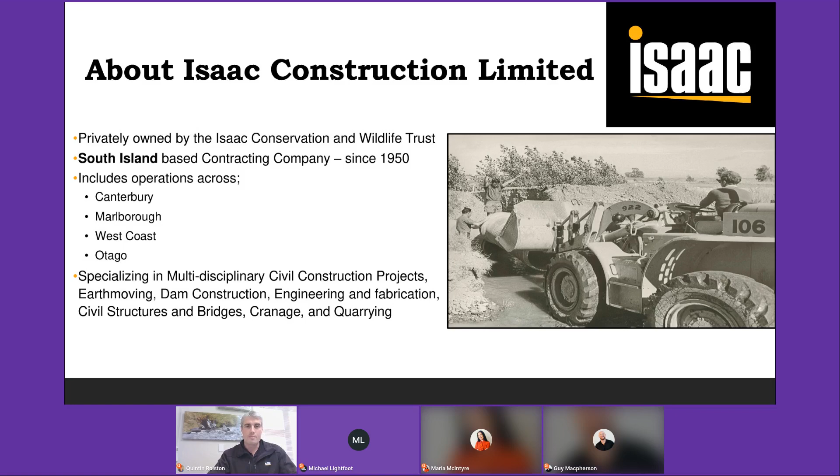We've got three key brands. Simcox is our Marlborough brand, Isaac Construction is our Canterbury and Southern brand, and Liddell Contracting is our West Coast team. And you'll see this pop up a little bit, as the Isaac Conservation and Wildlife Trust is our ultimate owner, and I'll talk about that at the end of my presentation a bit more.

So we're based in Christchurch. This is a view across our property where our key quarry is at the moment, looking back across Christchurch and over to the Port Hills. We're situated between the Waimakariri River and the airport.

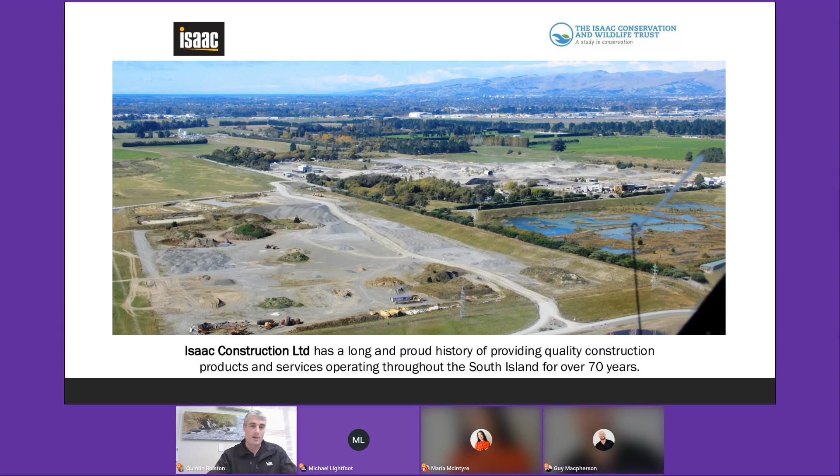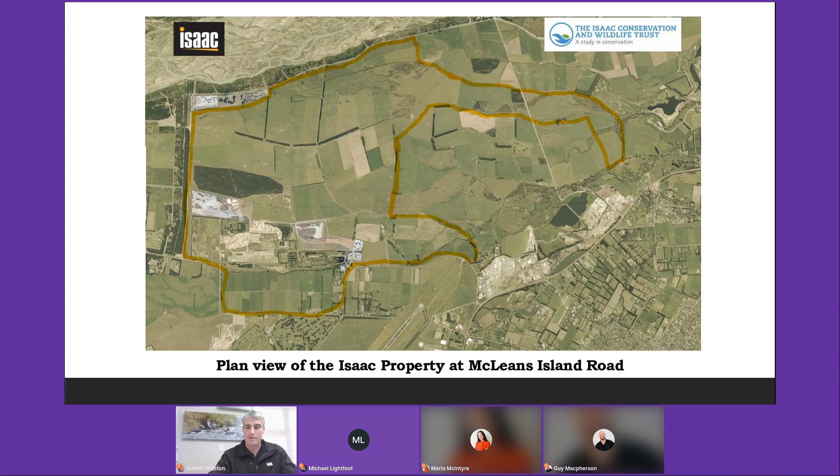Bit of a snapshot of our land there. We've situated 1,100 hectares, like I say, between the Waimakariri River and the Christchurch airport.

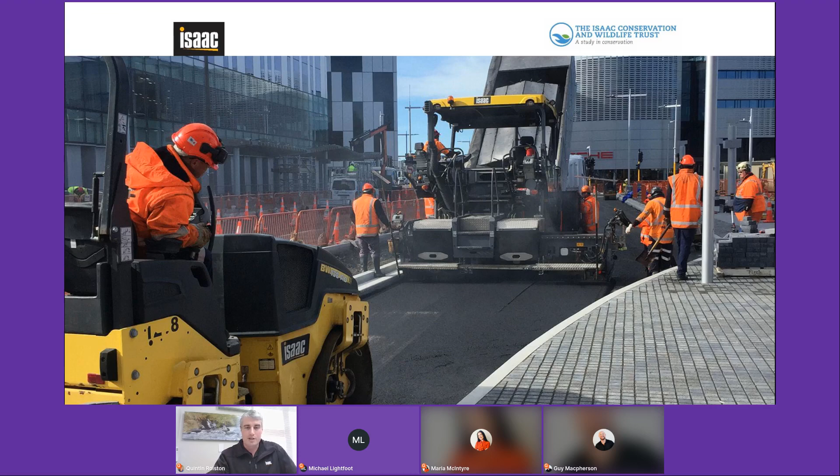Pictures are always helpful to actually visualize what it is that we do and why we might be interested in noise and vibration monitoring. So this is pretty typical of the type of things that we are out there constructing and building: streetscaping works, asphalt paving, paver laying, and general construction, particularly central city type construction works.

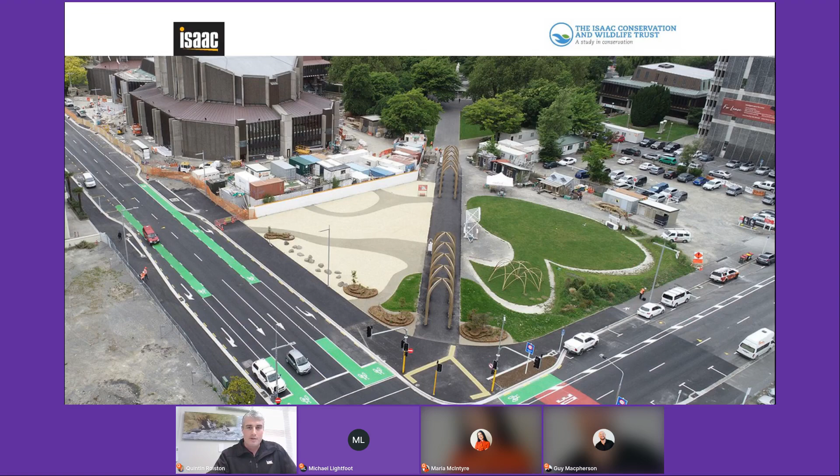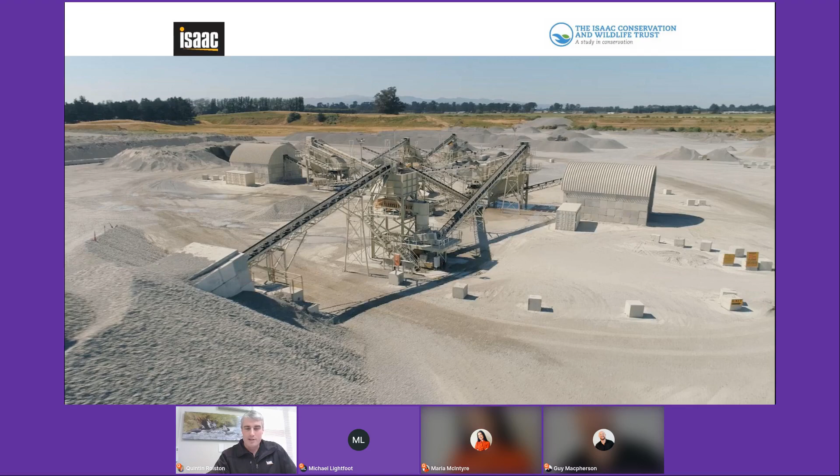Quarrying operations, so crushing and turning big stones into small stones, which is pretty interesting, but certainly has a noise, vibration, and dust effect on the surrounding community. Isaac Asphalt is a key part of our business here in Canterbury.

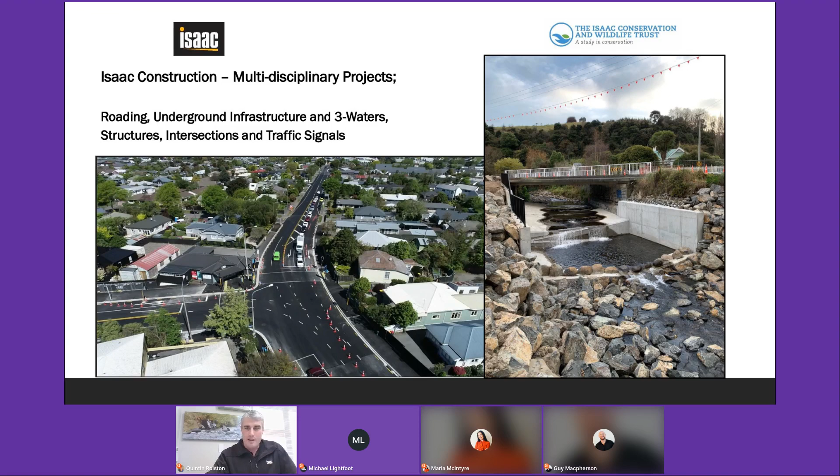And just a few more project examples of what we've been building. Christchurch Northern Corridor access into Christchurch on the left there, and a river upgrade project in Dunedin on the right. A bridge construction project on the west coast, which is just coming to completion now.

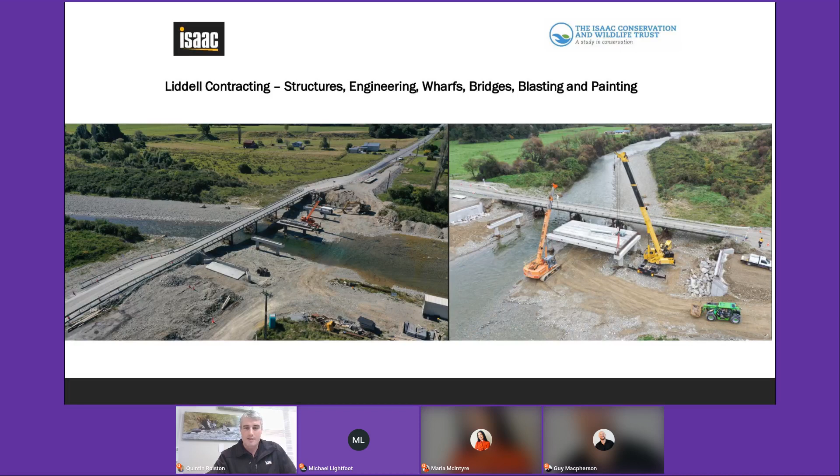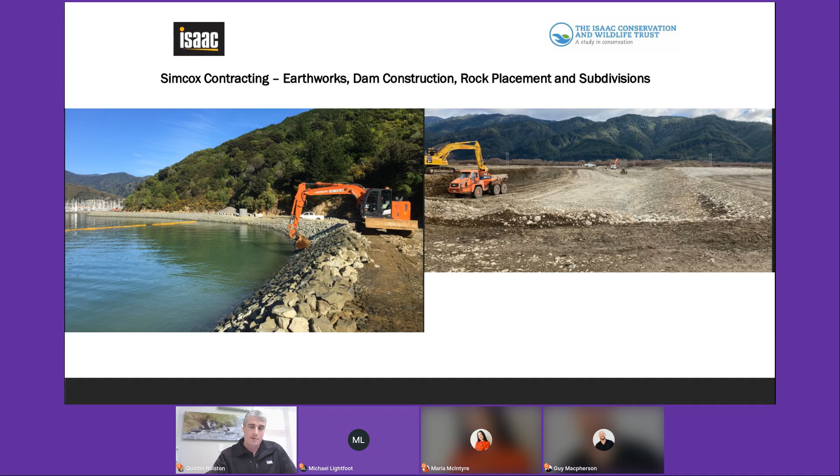And rock placement and dam construction and earth moving up in Marlborough. So that's a little bit of an overview of the Isaac, Simcox, Liddell businesses and what we do as a company.

So I'll move on to our particular project that we're looking at today, which is the Retail Quarter project, George Street upgrade in Dunedin.

This is the project area, an overview of the project area. For anyone that knows Dunedin, hopefully you'll have an idea of the Octagon. Our project starts one block north of the Octagon on George Street and Moray Place intersection, and it travels 800 metres north up to Albany Street, encompassing this central section of this photograph.

What we're additionally doing is the fringe works on Filluel Street and Great King Street, which is not how the project started out, but it's been added to our scope as we've gone through the process. And we're doing pretty substantial three waters upgrades across this entire network of site.

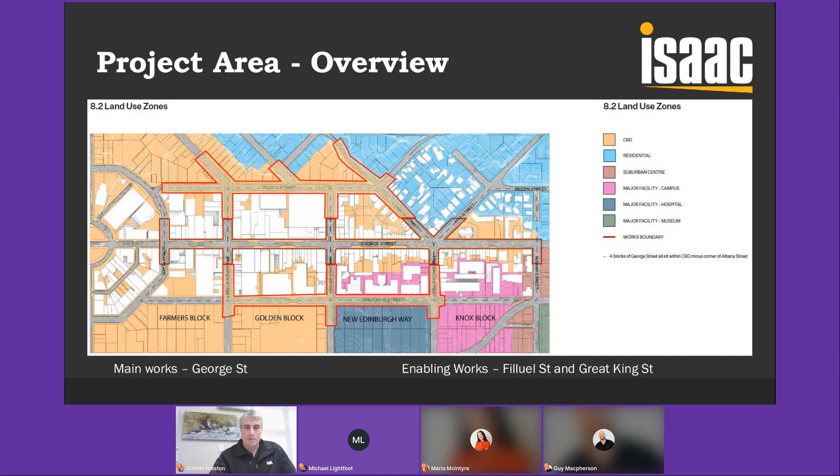The Filluel and Great King Street areas are three waters upgrades with more traditional streetscape topography replaced on top, so curb and channel, asphalt footpaths and generally asphalt pavements. The central spine through George Street and on some of the side streets there is more of an urban city mall environment. I'll show some photos of what we've currently got and what we're looking to achieve soon.

So what are we trying to achieve? This is what we're looking at building. Artist impression, I guess. But what this doesn't show is the substantial three waters and infrastructure upgrades that we need to undertake under the surface, which includes full replacement of all the sewer, which is about 4 metres deep and some pretty challenging ground conditions.

We've got some stormwater upgrade works, some pretty substantial stormwater upgrade works of some pretty big diameter pipes, upwards of 1650 in diameter, which just requires large excavations, large deep excavations, potentially sheet piling and shoring and other interventions. Full potable water upgrade. And this is right across the cross section of the street from the shop frontages right out through the centre of the road across to the other side. So it's pretty invasive sort of work that we're undertaking.

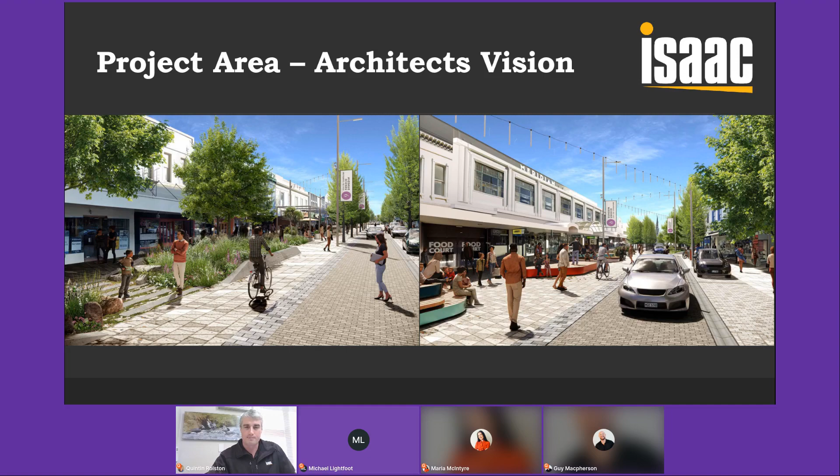So just a bit of a summary of it there. All three waters, deep excavations and trenches. We've been using trench shields to date, but there's a potential we'll need to use sheet piling in the future. The roading works are pretty substantial, full reconstructions. So a lot of excavations and dig out and full replacement.

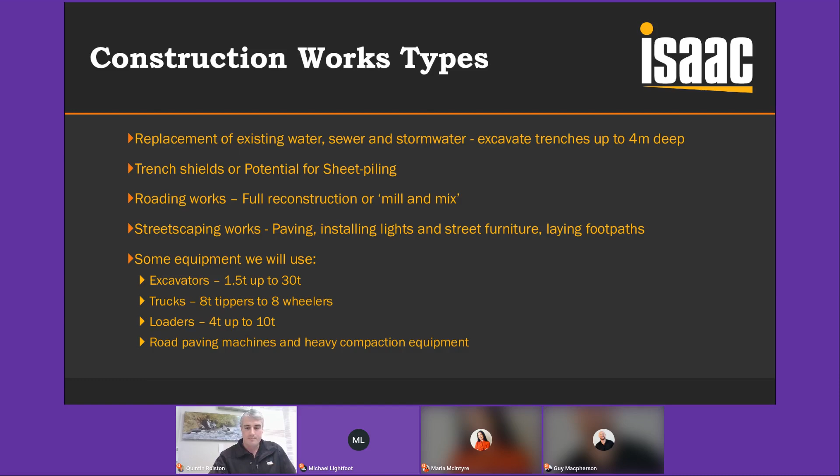So therefore a lot of compaction, a lot of vibration and noise. A lot of streetscape works, paving, new lights and street furniture and decorative footpaths, paved footpaths. And a bit of a summary of cross-section of machinery that we'll be using. So large excavators, hopefully not cranes, but there's a potential for cranes, certainly trucking, loaders, heavy compaction equipment.

This is just to give a bit of a snapshot of our staging plan for the project. The grey areas, there's three key grey areas there that are what we've largely completed to date, and then the rest colour coded and a bit of a mess, but it's our overlapping plan of how to deliver the works to the current program.

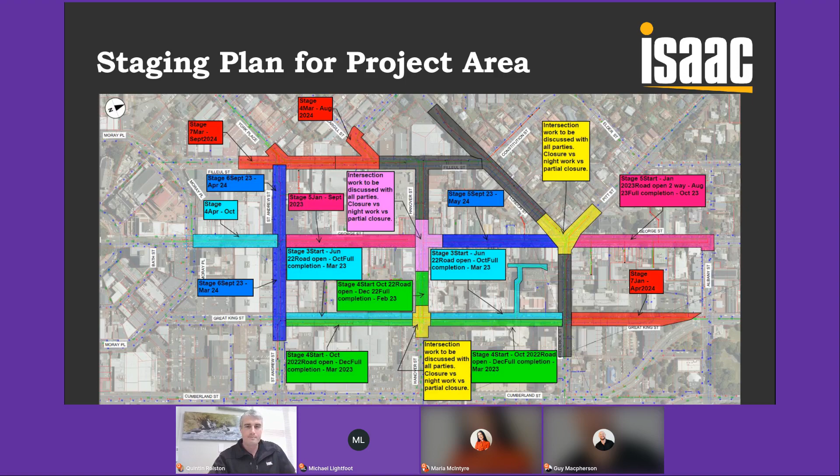So there's quite a few key challenges with undertaking this work. A few of the key ones I'll run through here is managing interface with stakeholders and shops. This work does go through the key retail offering of Dunedin. There's only three malls in Dunedin and they're within our project area. There's a lot of inner city retail and food and beverage offerings, small businesses and small retail shops, as well as big brand shops.

So our project is hugely affecting these people, and it's a key thing that we need to try and manage whilst doing some pretty invasive work. So managing the traffic flows, managing access, business disruption, and at the same time trying to complete the works as efficiently as possible and keep on program as much as possible, which is a real challenge.

Of course, we have to manage safety, which is paramount, of our people and the general public, and we want to complete the works to a high standard. And then the two key ones are managing expectations with regard to noise and managing vibrations. Additional to the retail offering through this area, there's also flats and apartments up on the second and third stories of many of these inner city retail shops. So that's just an added challenge to it.

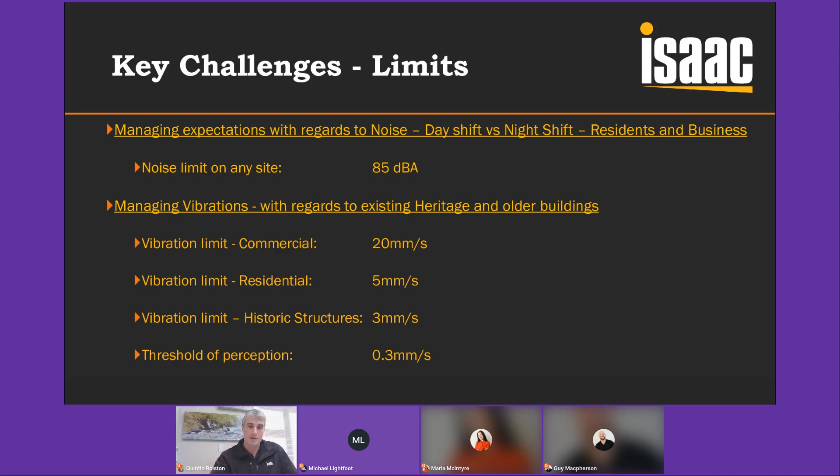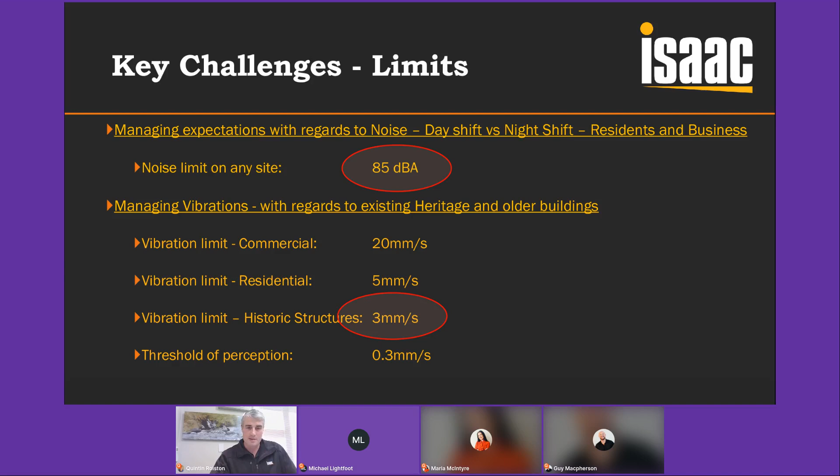These are the ones we've looked at as part of our project. The key ones we'll focus on are 85 decibels for noise and 3 millimeters per second peak particle velocity for measuring vibrations. That's a guideline set down for ensuring we don't damage historic structures, which we do have a number of within this project - heritage items and heritage feature buildings. So that's the limit we've set for ourselves, and that's what we're tracking against at this stage.

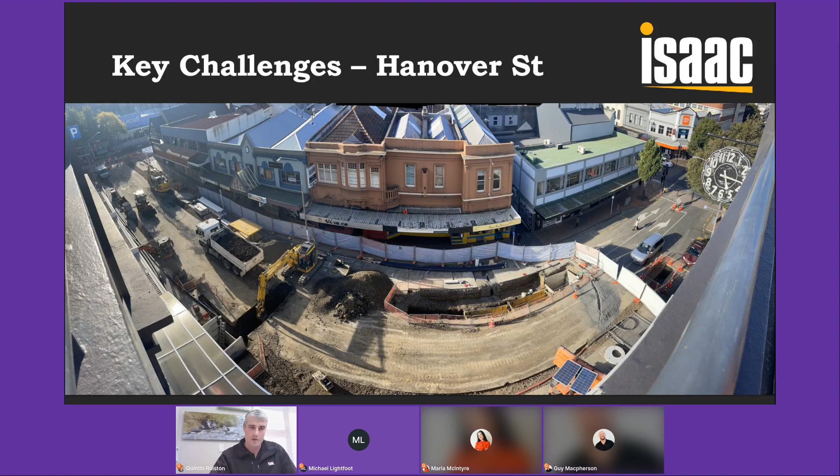And there's a snapshot of Hanover Street, showing how close our work site is to the shop fronts. In fact, we'll be going right up to the shop fronts and the boundary line with our new paving when we get to that stage. But it's pretty invasive.

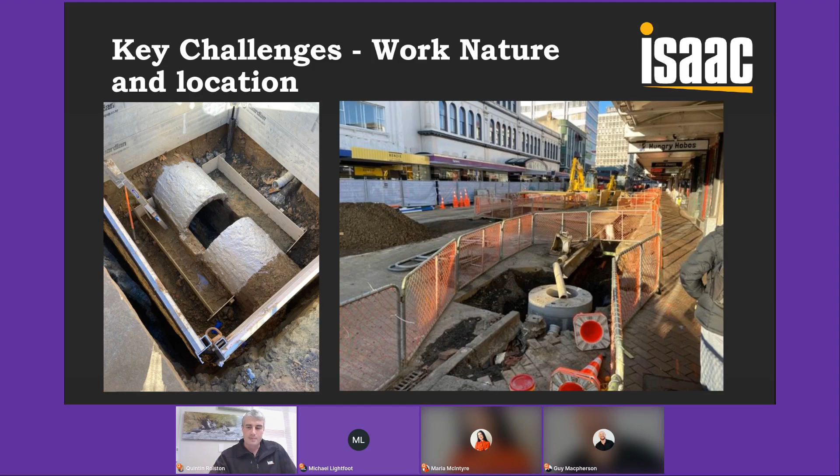But we can also get specific details for individual monitors. So this is a snapshot of the current noise level from when it was taken at 283 Great King Street. It was currently running at 50 decibels, but the graph on the right gives us the snapshot of the day. We can see from midnight it's hovering between 47 and 50 decibels, and then as we started work shortly after 6 a.m., 6:30 a.m., the noise level rose quite rapidly up to about 80, then leveled out a bit, floating around 60 to 70 decibels. That's reasonably typical for what we're seeing on many of our sites at our monitoring locations.

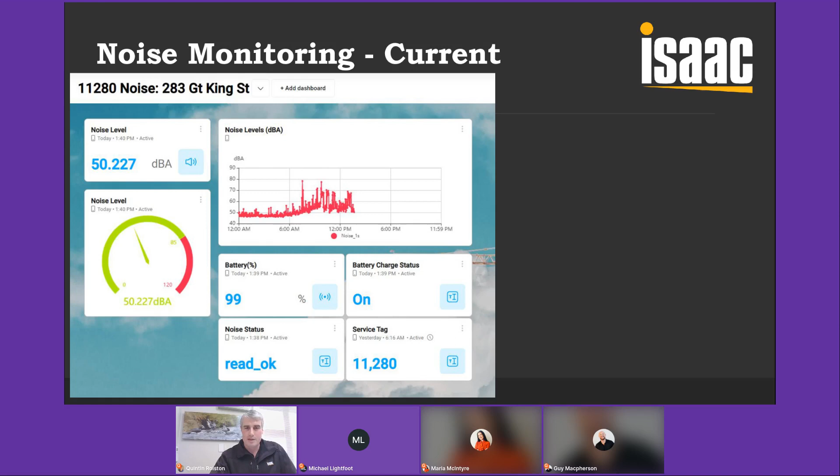So that's another snapshot, and further to that we can run reports for the last week, the last month, or any time period we choose, just by using the filters in the Adroit software. This is a snapshot from that same site, 283 Great King Street, looking at noise levels over the past week, and that shows nothing over 70 decibels for that particular time frame, which is generally fine.

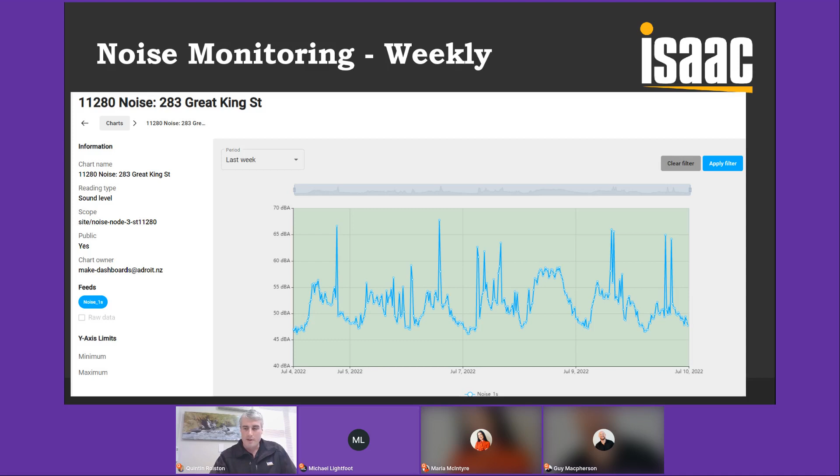I've added another one here, another one of our noise monitors at Farmers Block, which is on George Street itself, showing that these noise readings are getting quite close to our limit, and in fact some have eclipsed it on a couple of occasions. So I guess this is the data we can use to discuss with our client and stakeholders, and look at our work methodologies and noise screening opportunities. Because at the end of the day, we've got to do our work, but we've also got to manage noise and manage the expectations of the stakeholders and residents. This is the kind of report we can get out of the software.

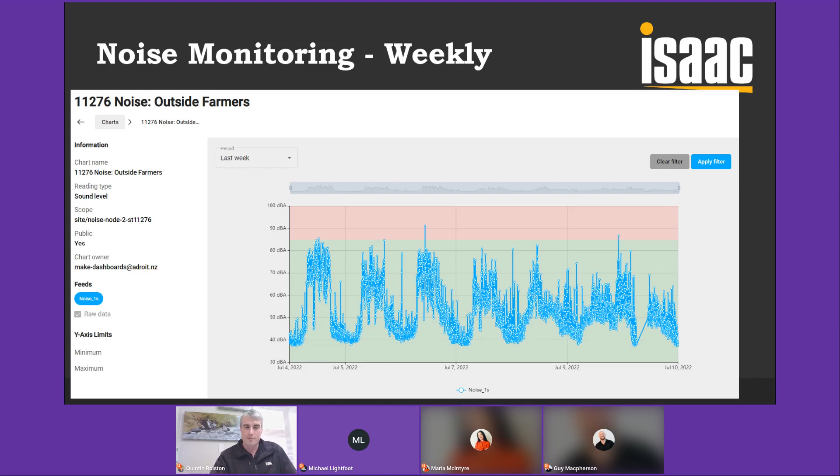But focusing just on one of them, 26 Hanover Street. If you remember back earlier, we've set ourselves a limit of 3 millimeters per second for peak particle velocity in all directions, X, Y, and Z direction, which is what I've highlighted or circled there.

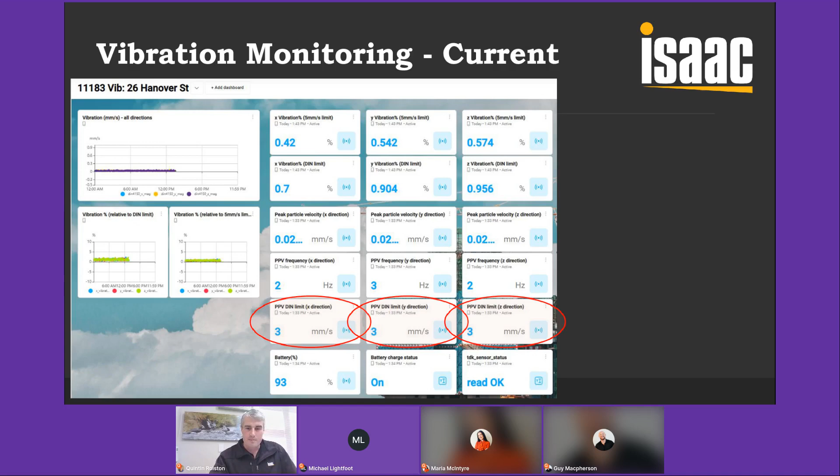The top left graph, which is a little bit small and hard to see, shows the actual peak particle velocity reading. It's well below 3 millimeters per second on this particular day, hovering at more like 0.1, which is pretty low. And what we generally look at is percentage reading towards that peak particle velocity. So I'll go into that in the next one.

Going back to that photo from before, this monitoring site is at this site where we were doing these deep excavations. So it just gives a little context on the type of work that we were doing and what these results refer to.

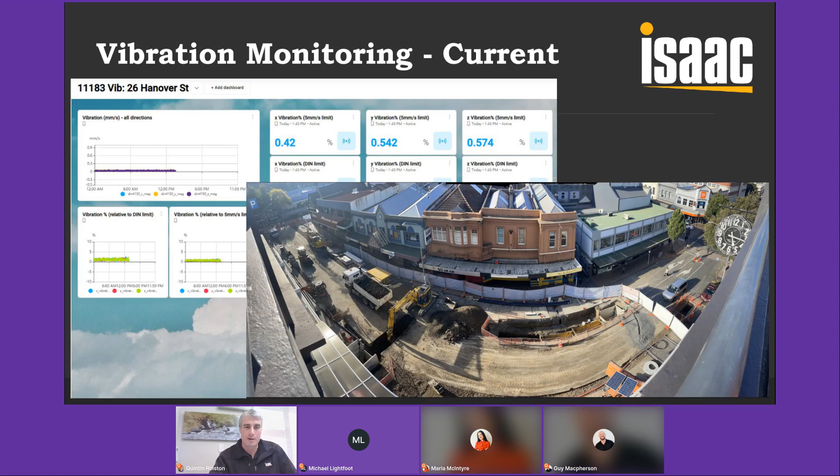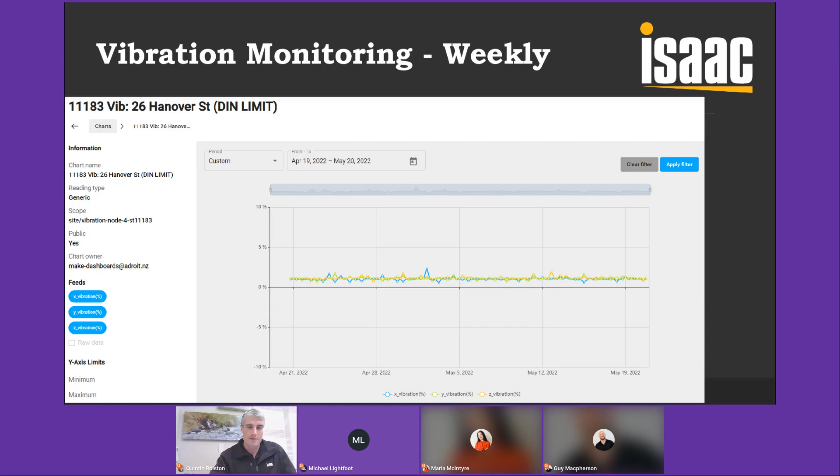And same thing as the noise monitoring, so we can pluck out a time period. This is looking at a month from when we started on Hanover Street through to the 20th of May. You can see right at the start of that graph very small movements, and then some movements over time over that month, but well below our limits.

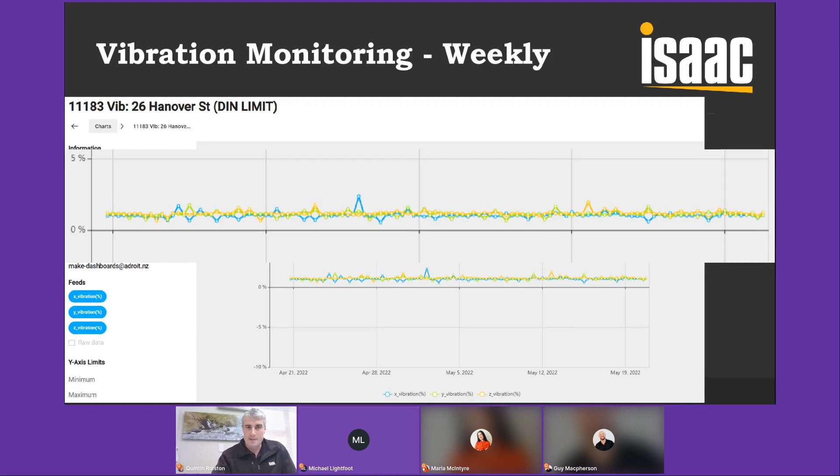But that's the end of the vibration noise overview for what we're doing here on site. And to wrap up my section, I'll just quickly go through Isaacs and refer back to the Isaac Conservation and Wildlife Trust, who we are and what we're about.

So founded in 1950 by Sir Neil and Lady Diana Isaac. They were contractors, but also conservationists at heart. They set up the Isaac Conservation and Wildlife Trust, which is operating in perpetuity and is the reason for the construction business to exist. We exist to ensure that these people can keep doing their good work.

The good work that they do is they are a self-funding charitable trust, established for conservation purposes, based out of Canterbury, but with operations across all of the 4 regions that we're working on.

They have 3 key mandates, I guess. First is conservation of native fauna and flora. The second is the conservation of heritage buildings. And the third is conservation education.

So we've got the Isaac Conservation Park, where we breed endangered birds. 5 species at the moment of endangered birds, and in partnership with DOC, we release them into the wild. And the team's done some amazing work over the last 25 to 30 years in that space.

We also rehabilitate our quarries into wetlands, reserve areas, and breeding facilities for that work to occur. We've created the Isaac Heritage Park, which again is on site out at McLean's Island Road, Canterbury. And the education is postgraduate scholarships in Lincoln, Otago, and Canterbury universities.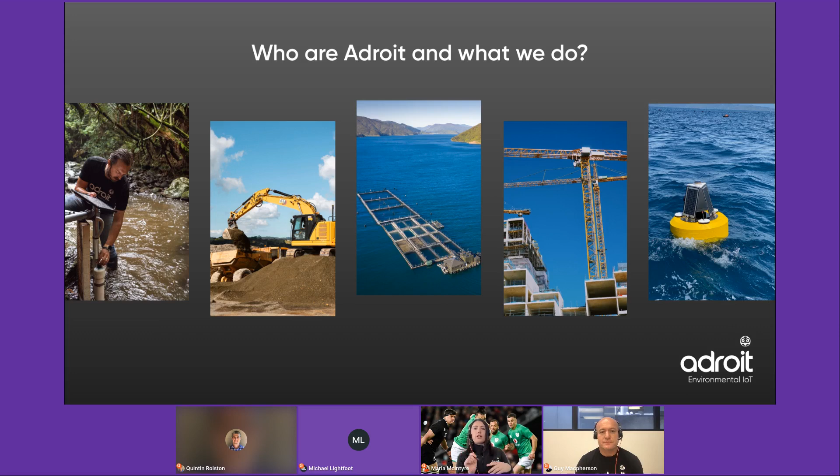On your screen here, you'll see some beautiful photos. We work heavily in the aquaculture industry, installing our big, beautiful data buoys for mussel farms, oyster farms, clients like King Salmon. We're also working heavily in the agriculture and catchment space where we're installing water quality monitoring for clients like Fonterra. And we're working on manufacturing and work sites where we're installing discharge runoff monitoring for clients like Ravensdown. And then what we're here to talk about today, the construction industry, where we're installing our dust, our noise, our vibration monitoring for clients like Isaac Construction.

Thanks, Maria. Okay, so we work with a variety of different types of sites. So why do we monitor on work sites?

We work with industrial sites, greenfield sites, and across civil sites. They all have different requirements. With greenfield type sites, you're looking at monitoring on the borders around your sensitive areas, as opposed to a working site like a hospital, where you're monitoring within the actual site.

The three areas we monitor around are your compliance - understanding the resource consents, the thresholds for that particular site - and it gives real-time data through to the site managers so they can manage that site efficiently.

The second one is around your complaint mitigation. This is about being able to bring up your historic data so you can actually see when there's a complaint, if the site is in breach. Potentially it may not be, so you're able to show the data and say, hey, look, it was maybe noisy, but we're well below the 85 dB threshold.

The third one is around your health and safety. This is where we monitor foundries, we work with crushing plants. It's understanding what's happening with the hazards on a site, understanding your PPE, when you should or shouldn't be wearing it on site, and just giving you greater visibility.

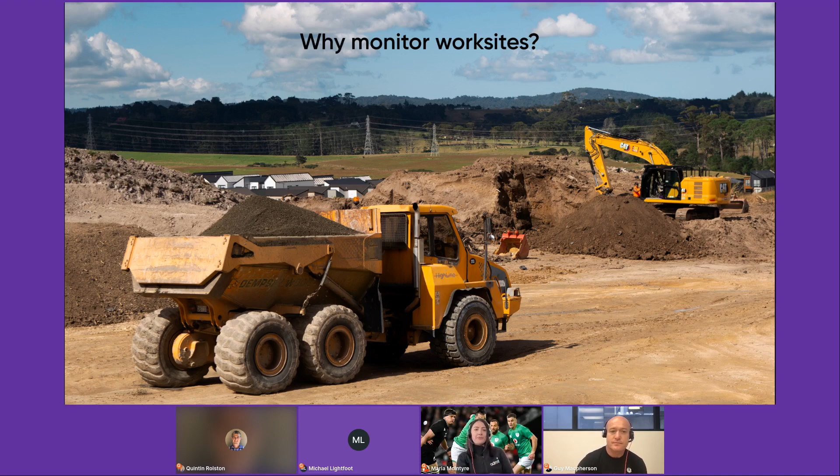Sweet, awesome. So now I'm going to take us through what our standard setup looks like, what the installation looks like.

Awesome, okay. So what do these look like in real world situations? I'm going to go through 4 different setups on 4 different sites. The one on the left is one we did with Firth - this is monitoring noise and dust with solar. As you can see, it's on a fabricated steel pole, so this is made to be fixed, not moved around the plant.

The second one is something we did with Dempsey Wood for a civil site. With civil sites, they're often really big sites with the work slowly working down them. As you'll see on this monitoring station, which is doing noise and dust on solar as well, it's got a base with sandbags in it. This means the monitoring station can actually be picked up and moved down site.

The third one is something we did with Precinct Properties. This is using existing structures adjacent to the site, and this is just monitoring noise. So this is with your inner city type environments, when you can install onto structures or existing fixtures.

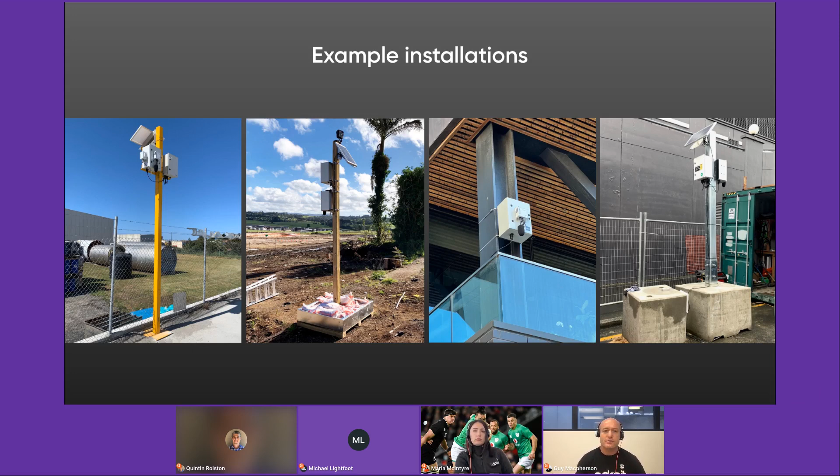Sweet. So now we have them installed, how are you going to access the data?

The platform can be accessed in two ways. You can download it on your iOS or Android app, and you can also view it on your browser, which is what you're looking at here. We wanted to get the most engagement possible from our platform.

On the left, you'll see one of our old type platforms - you're just looking at boxes with the data. On the right, you see we've overlaid a site plan, so a site manager can look at that and say, okay, here's all the sensors, and they can quickly figure out what's happening. They're all in green, which means they're not in breach, so they're within the set threshold.

Our platform - again, we sourced the best of breed platform, we didn't build it ourselves. It comes with all the functionalities you need: full visualizations, thresholds, alerts. There's a full set of APIs, so you can plug the data straight into your SCADA or your project delivery apps that a lot of our clients use, and then it can all be downloaded onto a CSV file or your Excel sheet.

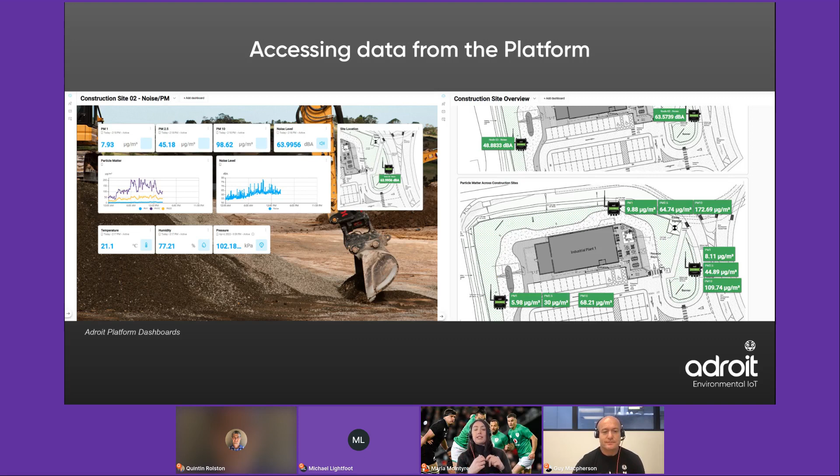And if we go to the next slide, it will show us the charts. So this is where you're going to get your deeper insight. We've set a threshold here of 85 dB, which means they've literally only gone above that maybe two or three times. Super compliant site. It's a great tool when you want to communicate that with your stakeholders, your staff, your board, or any people constantly coming on site. You can say, look, we're doing everything we can - we actually are not in breach, or we are, and we're doing everything we can to deal with it. So yeah, it's an awesome visualization tool.

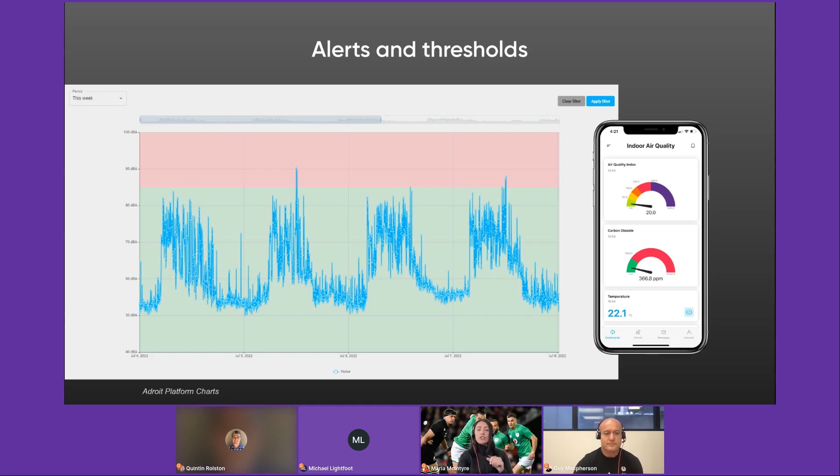Fantastic. Okay, so what about the installation, the maintenance, and support of the equipment? We have a nationwide team that manages all of this for you. One of our project managers will talk through with you, understand what the consents are, the actual type of site, and look at where's going to be the best place to position a monitoring station. We then look at what's the best way to install, whether it's on a post, on a wall, or whether we should organize the Deadman's block. We then look after the maintenance - to be honest, all of these solutions are very low touch, so there isn't a lot of maintenance required. And with any support, we've got phone support as well as our team that can come on site to do any break fixes.

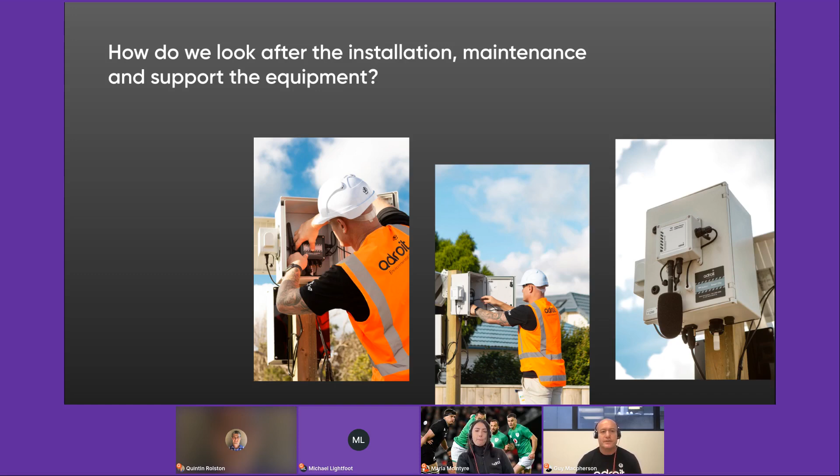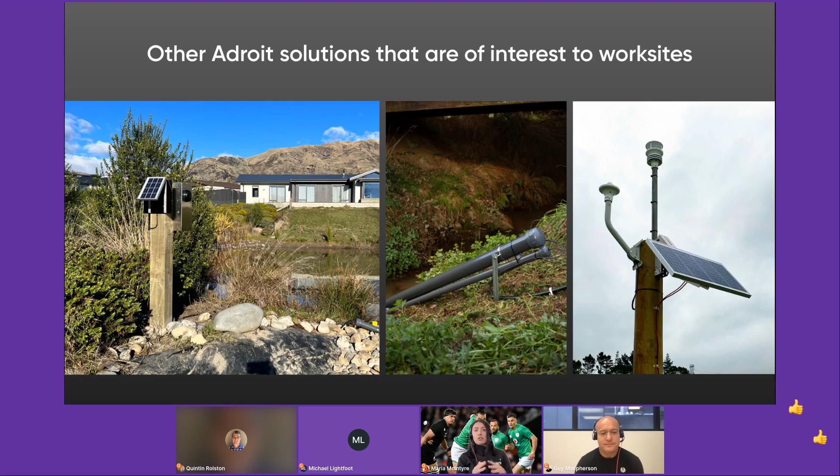Sweet, awesome. So as well as our dust, noise, or vibration, we also have a full range of gases and other solutions. We've got a full suite of weather stations - we're installing a lot of wind speed and direction on civil construction sites to track and trace the dust. We also install onto cranes for those extreme weather events when you want to claim back on a day's work. We also have our water quality solutions, so we're installing a lot of turbidity and pH monitoring for your discharge runoff - this is around your sediment and pH around the concrete. So yeah, if you have any questions on the other solutions, please fire them through.

Cool. And I guess the last thing to mention is that we have a partnership with Spark. It's a reseller agreement, so what that means is when you do a solution through us, it's charged on your Spark account. We've got finance options available - interest-free options, subscription model. The thing to note, however, through this whole process, is that it's Adroit staff who will manage you through the process, and we will provide the ongoing support for all of our solutions.

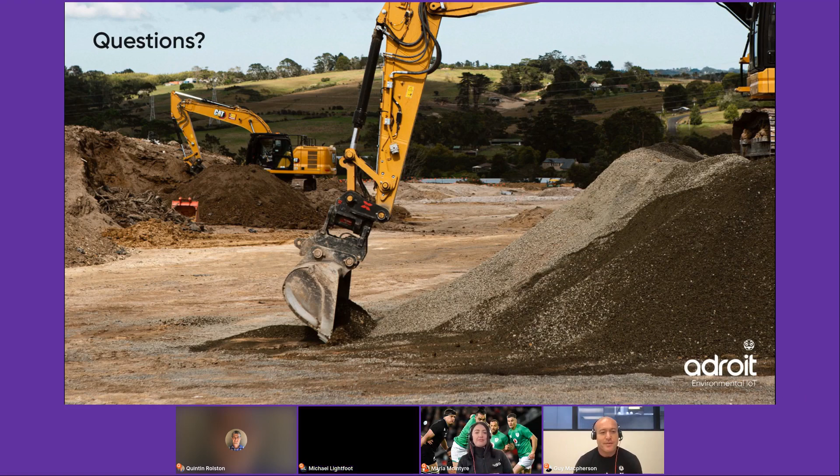Hey, thanks very much, guys. That's really interesting information to share with the people in the group. It's good to see the technology actually being used down in Dunedin, and also what else it can be used for. So it's really now time we'll go through the poll results and also a bit of Q&A.

I think noise is probably one of the most popular ones that we monitor, actually. Yeah, noise on a construction site is certainly pretty controversial at times.

So vibrations for us is probably more around damage to buildings. That's where we are really keen on it for Dunedin, because we do have a number of heritage structures - or I think they call them heritage feature structures, which aren't actually heritage, but they have heritage features involved in them - and certainly don't want to be damaging or cracking those.

Yeah, and we find dust is really important on civil sites, more when you've got those bigger sites or across quarries, and probably more around the compliance side as well, making sure that they're actually not getting across those thresholds. Yep, absolutely. Well, thanks very much, team.